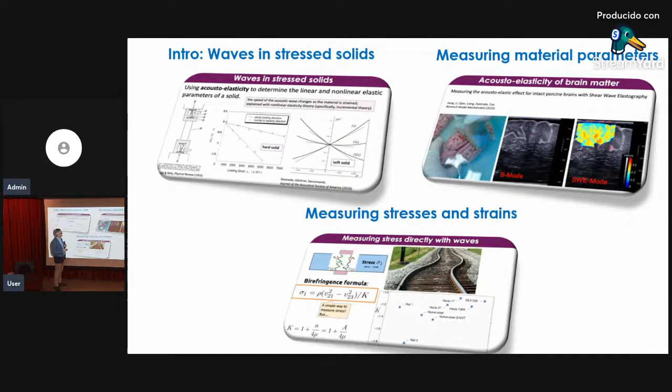I will introduce you briefly to the topic of waves in solids. Then I'll show you how traditionally it's been used to find the material properties of solids. And now I'll show you a new way of measuring stresses in solids. One way to do that: the idea is you send a wave in a solid, you measure how fast it goes in many directions maybe, and from this you can infer some conclusions, maybe anisotropy, maybe, you know, the faster the wave goes, the stiffer the material, so on and so forth. There's a lot of theory behind this, and you can easily connect the quantities one to another.

That's for linear elasticity. What if you want to go further and do nonlinear elasticity? Imagine that material is subject to not only a small strain, but a little bit further. I forgot to say, please interrupt me anytime you don't follow something, or if I'm not clear, or if you have a question.

No problem. So traditionally, what you do, if you want to know, say this is a piece of concrete or metal, for instance, and you want to know the material properties of this piece, you want to know how stiff it is, what are the elastic coefficients. So you send a wave, and you get access to one constant.

And now, if you were to deform the material, so here you see it's being compressed, then the wave speed is going to change, and that's what we have here. Changing the wave speed with the strain. What you do, you can have an acoustic actuator here, receptor here, you just send a signal and measure how long it takes to reach the other end. Then you increase the strain, and you can see that there are changes in the speed. There's two speeds here because there's two waves you can have, depending on the propagation, polarization, and so on and so forth.

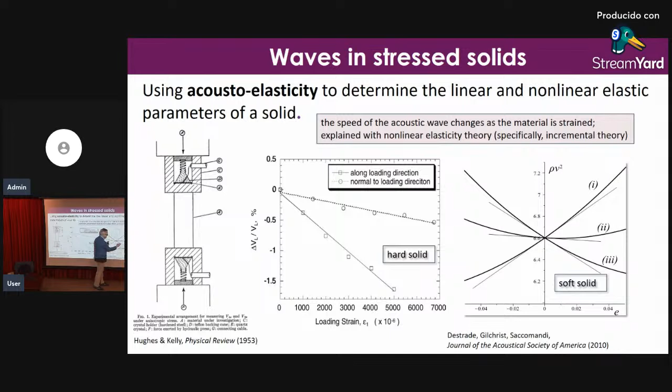Now, what if the material was soft, or could be deformed more? For instance, 2%, 4%, and then you will need to go a bit further in the expression of the speed in terms of the strain. But it's not that difficult. I teach this course often in graduate classes. It takes maybe a couple of weeks before you get to the formula, and then the formula is very simple. I will show you the formula. So you can either learn how to derive the formula, or you can just use the formula straight away. But you will find that at the beginning it's the linear variation, and then it's the quadratic variation, and so on, and that involves the other material properties.

Anyway, so I've been doing that mathematically, and then in the past 10 years or so, I've been doing it experimentally. But mathematically, like I say, it's quite simple. So you look at the propagation of the wave in the material that's deformed, right?

Lambda is called the stretch ratio, E is called the extension. If E is 0.2, for instance, or minus 0.2, it means you are compressed 20%.

And then you have to make some assumption about the material. You have to say, okay, maybe it's a soft biological material, so I'm going to look in the books, and they tell me that the Fung strain energy is quite popular. So I say, okay, I'm going to use this material. Then I won't go into the details.

Here you see the mu, that's called the shear modulus. You might come across that. And then B here, that's the stiffening parameter. That's, the more you stretch, which seems to be like an exponential growth in the strain energy. So really, that's what I mean by stiffening.

So there's just two parameters here, mu and B, that I need to determine for my wave speed measurements. And then if you do all that theory I was telling you about, you will find this relationship between the speed, that's the mass density, and then here you see there's mu, what I want to find, and b, what I want to find, and lambda that I can measure when I'm deforming the material.

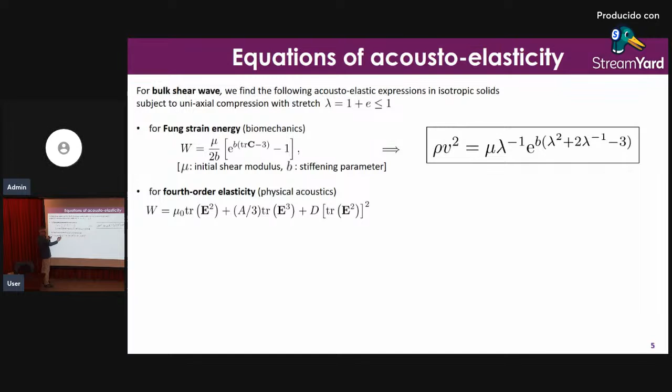So if you have a linear incompressible material, that's the strain energy. If you go a bit further, you expand in terms of E, the Green-Lagrange strain tensor. You have more constants that appear. These are called the Landau constants, or the Murnaghan constants. I don't know if you've come across this.

Don't worry too much. Say I want to find those three constants using that theory I was mentioning earlier. You will find this relationship now between the speed and the constants. You can see there's linear variation in the extension, quadratic variation in the extension.

And then in practice, these are measurements we did for the brain, for instance. You have a piece of brain, you measure the speed in the piece of brain. When there's no deformation, we find rho v squared is about, oh sorry, that's not in meters per second, that's in pascals, we find about 2000 pascals. So that tells you that mu, when E is 0, mu is about 2000 pascals.

And then we deform the material 10%, 20%, 30%, we just compress it, and we see that the speed increases. Now we just need to do a curve fitting exercise, very simple. We need to curve fit this to a quadratic, and the linear part will give us A, and then the third quantity will give us access to D. Or you could do curve fitting to this, and also. That's it. The principle is very simple, and anybody can do that using Excel probably, right?

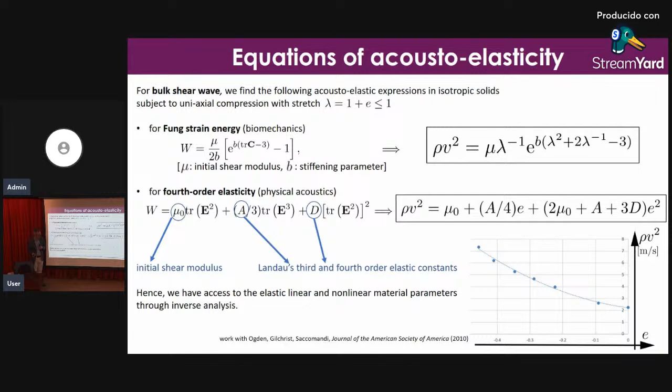And then you have access. That's it, that's the idea. How easy is that? I'll show you how we do it in practice. In practice, we use what's called shear wave elastography.

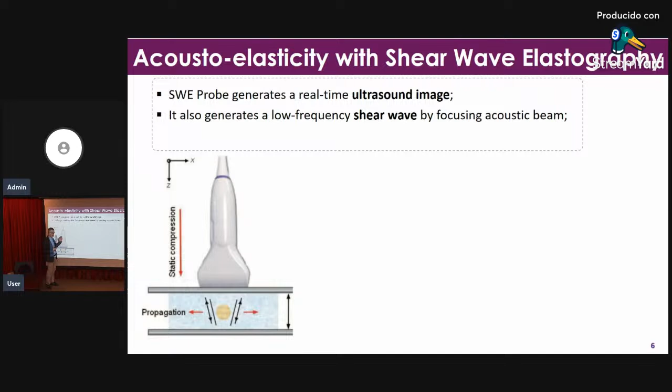So that's a machine you will find probably in Madrid, there's a couple of hospitals who have that machine. It's like an ultrasound imaging probe that gives you an image of what's underneath here in the tissues, for instance. And not only does it do that, but it also generates a shear wave. The ultrasound image is very fast, about 10,000 frames per second. So when the shear wave is generated, it just goes through the field. It's like a real-time video, and so you can capture it and measure its speed. It's very clever, and so that's the principle.

And what happens is that you focus a beam inside the tissue at the point where it's going, if you want to create a sort of small explosion, and then the focus of the beam goes deeper and deeper into the tissue, and then those successive explosions interact constructively to create a waveform here. That's the shear wave. So it's much slower, the shear wave is quite slow compared to the speed of the beam focus.

Okay, don't worry about this, just to tell you that this is pretty, there should be an animation here. Okay, don't worry. We did finite element simulation of what's happening, and so the beam goes down and the wave just travels like this. And then the ultrasound video just captures the wave and tells you how fast it is. And that's how we can do those measurements.

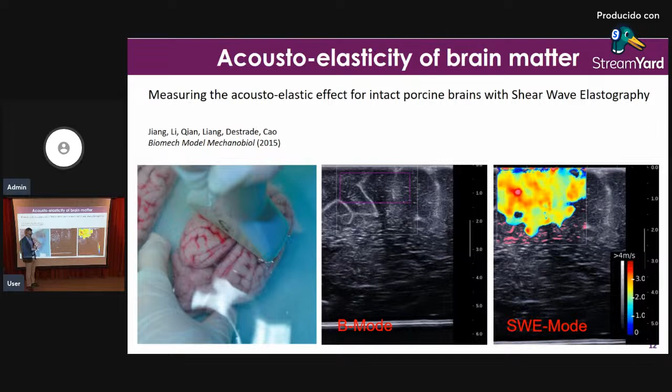Right, so the principle is very easy. We have those curves, we do the curve fitting to this, to that, and then we get access to the parameters. So just to show you what it looks like. Oh sorry, went too fast.

So we did this for 6 pigs, the left and right hemisphere, trying to find differences. There wasn't much difference. You see it's about 2 kilopascals, 2000 pascals for the shear modulus, and then you have nonlinear parameters, B for the full model, A and D for the fourth-order elasticity model.

So 2000 pascals, that's very, very soft. I don't know if you have any idea, but usually for rubber it's in the megapascals. For steel and quartz it's in the gigapascals. So brain is very, very soft - soft as, I don't know, yogurt basically, or jelly.

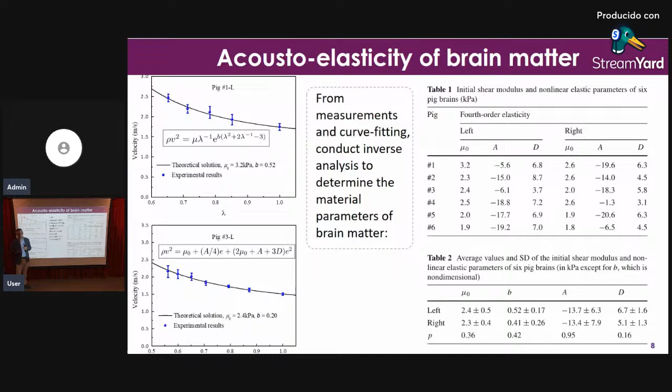Once you have the parameters, you can feed them into computer simulations. You guys do computer simulations, use Abaqus, COMSOL, that kind of thing. You know that when you define the geometry - this is a model we use in UCD in Dublin - you also have to feed in the elastic parameters, and the accuracy of the simulation is going to be as good, or as bad, as the accuracy of the parameters.

So here, that's a PhD supervisor. The PhD student is not happy.

It's very hard to know what happens in the brain because you can't put cameras in the brain, or sensors in the brain, during an event - maybe a concussion like here, or a car accident, or maybe surgery. But if you do a computer simulation, you can get an idea of how high the stresses and strains are inside.

Okay, so that was the first part of my talk.

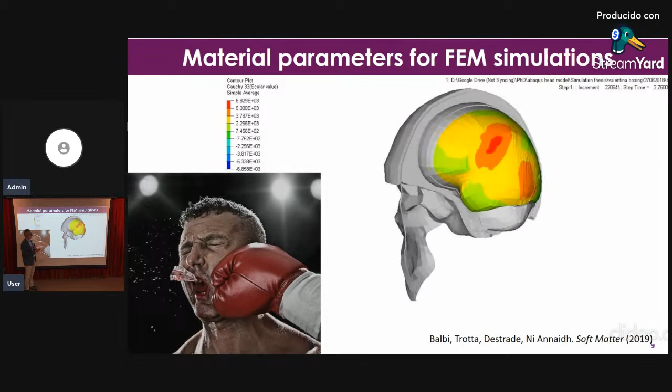You all happy? This is called traditional non-destructive evaluation of material properties, and that's the result you can get if you do computer simulation. Okay, now that's all good.

But what if you don't know the material properties of the material, or you don't have access to them? That's tricky. For instance, look at this beam here in the room, or think, since you're into aerospace, of a truss or a piece of metal in an airplane. The airplane is maybe 20 years old. You knew what it was made of at the time, 20 years ago, but ever since it's been going through thousands of cycles, suffering from fatigue and so on. Probably the properties have changed now.

Or look at this railway here. If it expands, going through those expansion and contraction cycles, and expands too much, it can buckle. It might be very important to know the state of stress in the rail before it buckles, because maybe you have guidelines telling you that if it reaches this stress it might buckle. So it's important to follow the stress, but sometimes you don't have access to the material properties. The only way I could access the material properties of this rail is to cut out a piece and bring it

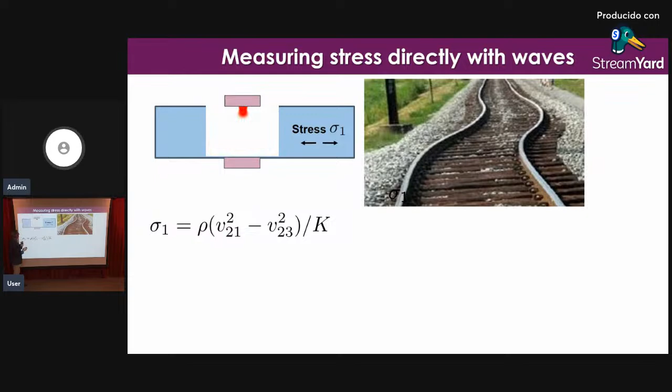So what you do is put an acoustic emitter and receptor here and measure the speed of two waves. One wave, 2-1, goes along the 2 direction and is polarized along the 1 direction. And 2-3 goes along the 2 direction and is polarized along the 3 direction. These are easy to measure - it costs nothing. Those ultrasonic actuators, you buy them for pennies, a couple of dollars or euros, and then you just rotate them and you get this.

So that's easy. And then you have this K here - that's the problem. What is K? If you look it up, it's called the birefringence coefficient. You'll see that it's defined in terms of A and mu - remember I was introducing A and mu earlier, or n if you use what's called the Murnaghan constant.

So it depends on second and third order elasticity constants. And you say, okay, so I just need to know K for this rail, and I'll be able to find the stress. But if you look in the literature, the problem is that there is no agreed value for K of steel.

If you look in the literature for a railway, you will find all sorts of values. There's different rails, there's different ways the steel is made, but the values vary a lot, from minus 1.8 to minus 1, and some of those rail samples were from the same railway, and yet they got different results. So it's very unsatisfying.

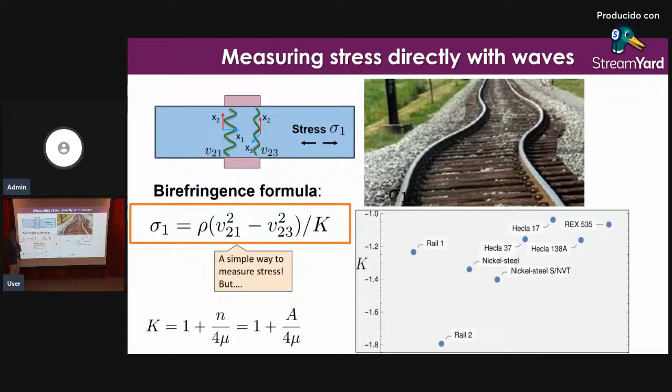You won't be able to measure the stress accurately. So a birefringence formula is used, but it's not great. So we looked into the literature again, and then we came across this formula. That's great. Look, all you need is mass density and the wave speed of two waves.

That's from Maurice Biot, 80 years ago. He said, all I need to do is measure the speed of the wave propagating along 2 and polarized along 1. That's the one I was showing you before. So I put the method here. And then the 1,2, that's the wave propagating along 1 and polarized along 2. That's the problem, right? That's why nobody uses this formula, because how am I going to measure this?

I don't know, I can't put a receptor inside the rail. I'm in trouble. So maybe I just cut it open and put the receptor in. But when you cut it open, then you're damaging it, it's destructive. So, big disappointment.

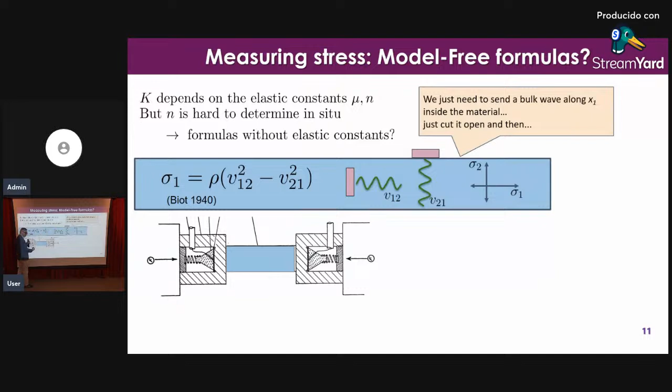Remember, the only way you can do that is by cutting a piece and bringing it to the lab. So, here's something I want to show you. Some maths now. You ready for the maths?

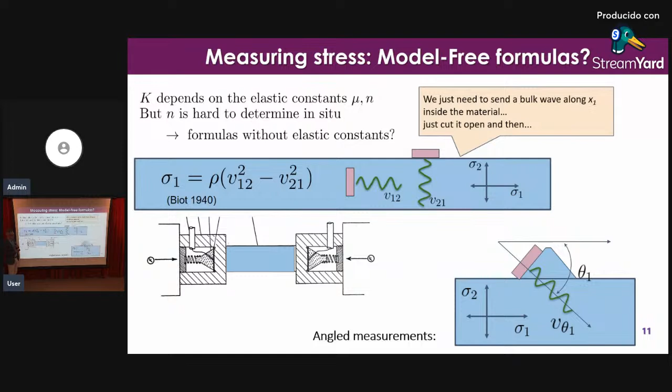Okay, so that's the speed going at right angle with respect to the axis. What if the wave was going at an angle? Why not? Let's see, that's not too hard. You put a wedge of steel, and then you just put the emitter on the wedge, and it's not too difficult to do that. In fact, we're doing that now in Sheffield, at the University of Sheffield.

So then you start looking in the literature. First, we're going to consider incompressible solids. Steel is not incompressible, but imagine it were. You find this very neat formula. I think that's very common. We wrote it in this form.

What do we have? Rho v squared is alpha. Here theta is the angle. And then you have alpha, beta, gamma. Beta is complicated, we won't need it, so I won't tell you what it looks like. So alpha and gamma are pretty simple expressions involving the stress and the stretches. Lambda 1 is the stretch in one direction, and lambda 2 is the stretch in the other.

Now look at these two coefficients. If I subtract one from the other, I will see that the fractions disappear. So if I was able to measure alpha minus gamma, I will get the stress straight away.

Okay, some maths now. Let's do some maths. What if I was to use this angle, 90 degrees minus theta? Then you might remember from high school that the cosine turns into sine and the sine into cosine, and so on. That's the formula for this complementary angle.

Now look, you have to do this in your head. If you subtract one from the other, the beta terms cancel out. The alpha term is factorized by cos^4 minus sine^4. The gamma term will be minus cos^4 plus sine^4. So I can factorize.

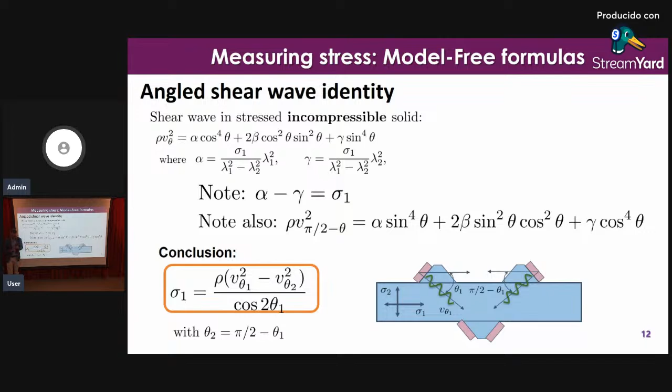So we're working on checking this formula in the lab now. That was for an incompressible solid, so now if you go to compressible solids it gets a bit more complicated, but you find that the formula still holds, which is great. It's very robust, provided you stop at third order elasticity. There will be corrections due to compressibility, but that's higher order, so the formula still holds.

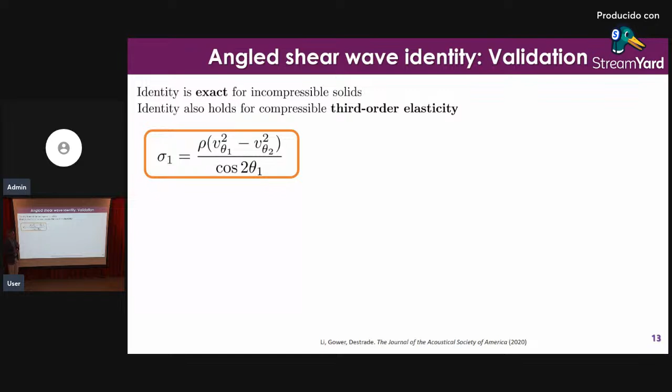The first thing we did for this paper is finite element simulations to measure the speed of the wave in a compressed beam of steel. Then from the formula, we deduce the stress. From the simulation, we know the applied stress, and you can see the difference is less than 1%. It's incredibly precise, at least in the simulations. So now we're trying to do it in the lab, in Sheffield—they're funded for this project by the US Railway Association and by British Rail. There's a huge interest in the rail industry about knowing what the stress is.

Okay, so you ready for the quiz now?

Any questions? Is there any refraction in the wave between the wedge and the structure? Yeah, there could be refraction. In the simulation it's easy because we have a perfect material. In the experiments you need to have a wedge, and there could be an imperfect interface, and then there could be some refraction. We're hoping that those effects are small compared to the formula, but you could in fact take that into account.

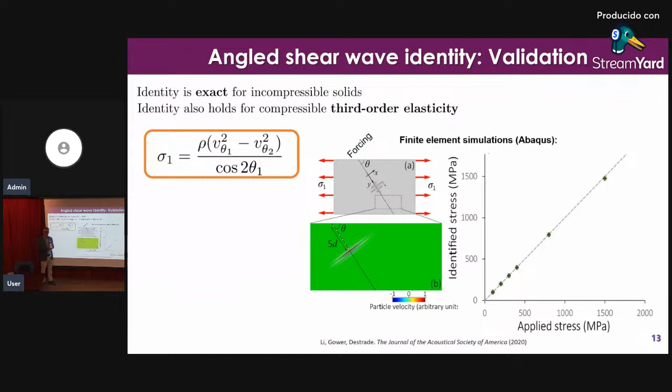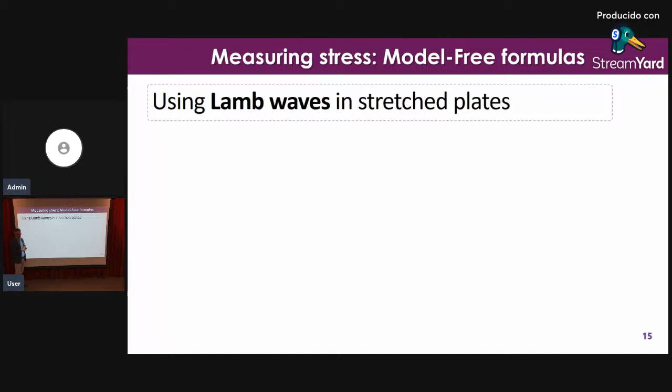I don't know if you do acoustics or waves, but plate waves are very similar to body waves, except they bounce off the boundaries. If the thickness of the plate is comparable to the wavelength, then you have all sorts of effects and the wave is more complicated. You'll also find there are different modes, symmetric and antisymmetric, and the wave is dispersive. When you generate a wave by hitting the plate, you get an infinity of wave modes propagating—symmetric and antisymmetric—and waves that propagate fast and waves that propagate slow, depending on their frequency. That's what's called dispersive, so the math is a bit more complicated.

You end up with a transcendental dispersion equation that you have to solve numerically. But still, you'll find that it depends on the frequency, and it depends on those two quantities I was telling you about earlier, and the beta as well, and so on.

It just so happens, if you study the dispersion graphs, you will notice a few things. There are limits, there are ways of getting information about alpha and gamma from the dispersion graph. One thing you can find is that you have access to alpha and gamma independently from the dispersion curve, and that's brilliant, because remember, alpha minus gamma is sigma.

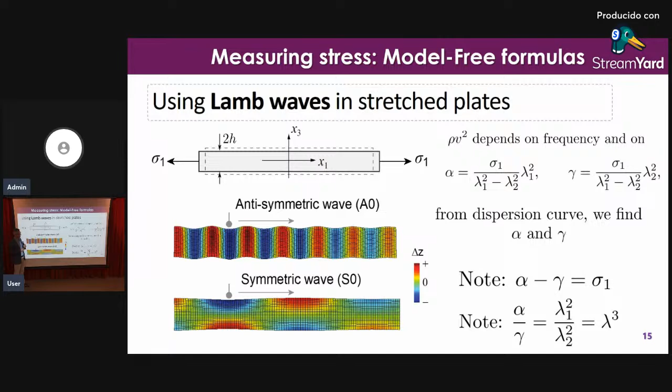Amazing. And we say, okay, let's do it. We did it for a rubber membrane. We hit it here with a piezoelectric probe, and then I make it sound like it's easy, but it's very advanced.

I used colleagues in the Harvard Medical School, and they use what's called OCT, optical coherence tomography. It's like a laser imaging technique that allows you to pick up tiny displacement on the surface of materials. But you get access to the antisymmetric, symmetric modes and so on. It's a lot of image processing, two-dimensional Fourier transforms, and so on and so forth.

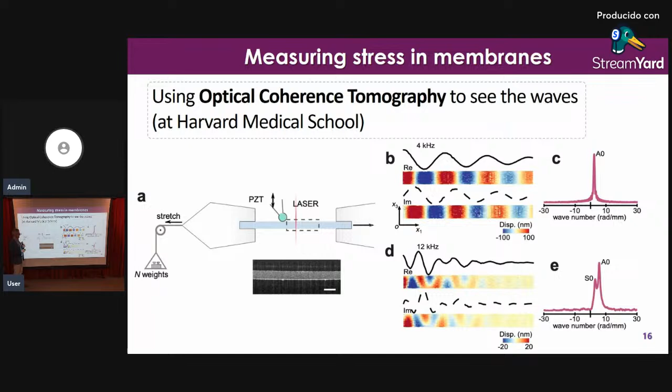I won't go into the details, but the idea is that you have the membrane, we hit it like this, and this is a photograph, not a simulation. If you look closely, if you zoom in, you will find some imperfection. So it's a photograph.

The radius of the wavefront is in the millimeter. The elevation is in the nanometer. So what we did here was blow up the vertical axis, that's why it's arbitrary, blown up from the data, so that you can see exactly those wavefronts we saw earlier about the water waves. But it's a photograph. Amazing, I find it amazing.

And then you can stretch the material by a known amount of stress, and you can see that the circles turn into ellipses. You then analyze this field here. So that's all the movie from above. You can see it effectively.

Then you analyze the film and figure out the speed of each wave for each frequency. And then if you increase the stress, the dispersion curves are going to shift like this, and so on and so forth. And then from the dispersion curve, I can find alpha and gamma, and so I can find sigma. Sigma 2 is 0, that's as it should be.

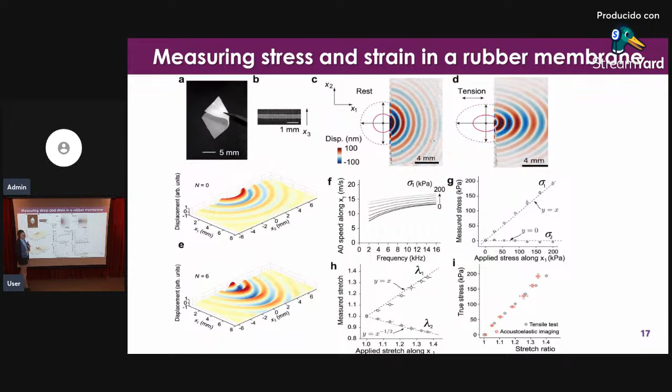So if you're like an early-stage researcher, you say, this is fantastic, this is brilliant, I will write a super paper about that. But then if you're more seasoned, or if your advisor is more seasoned, he or she will say, why don't we push it to the limit, make it more sexy if you want. You could sell it to a bigger audience.

And then I said, let's bring it to the next level. In fact, it was my wife who said that. So you shouldn't underestimate the power of trying to explain what you're doing to others.

I'm sure you have friends who are not in this field, and they ask you what are you doing with your life, what are you studying at your age. You have to explain it's really important, and then they go, oh, I see what you mean.

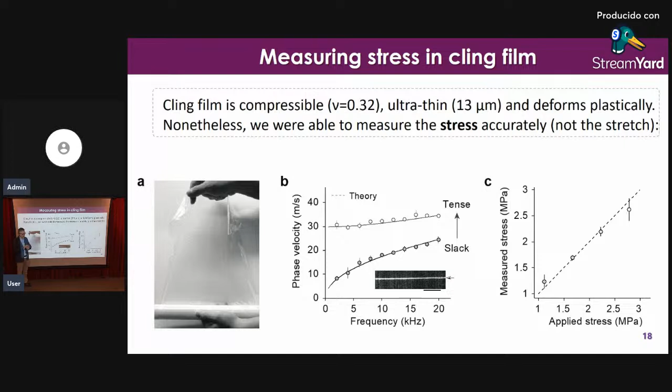I was telling my wife we were measuring the speed of waves in stretchy materials, and she said that makes me think of this drum, the bodhrán. I'll show you what the bodhrán is. It's this traditional drum in Ireland. If you go in the pub there's a good chance you might see one. Shall I click it? Oh never mind, there's a YouTube link.

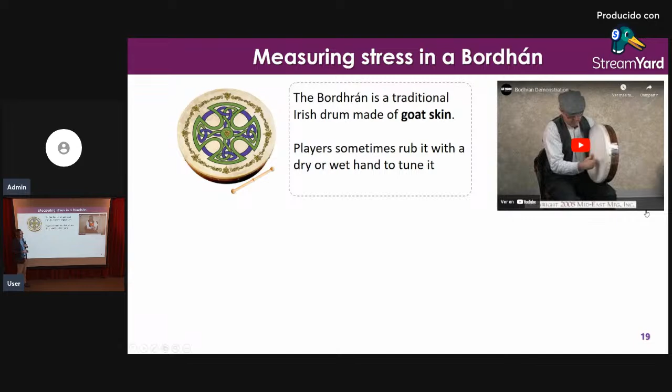Anyway, she told me, did you know that bodhrán players sometimes wet the drum head to make it slacker, or rub it to dry it and make it taut? That's really interesting, it turns out everybody in Ireland knows that. So I thought, why don't we do that? I bought an Irish drum online and sent it to Boston, delivered during COVID, it's crazy. They did experiments, wet it, dried it, and saw there was a big shift in the stress and strain, more than 50% difference.

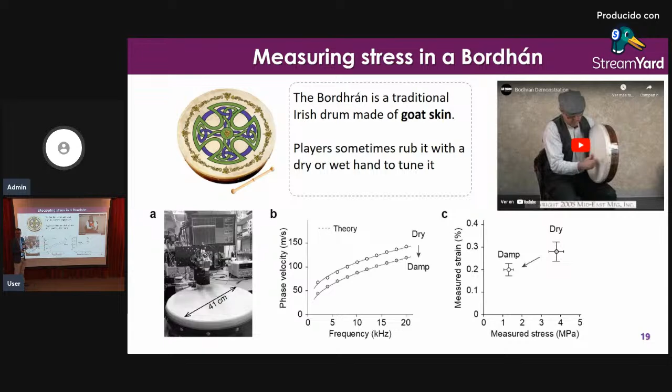That was pretty cool, so we put it in the article. Once you have an article with a sexy result like this, you write a press release and send it to the press office. You say, hey, I got something about the bodhrán, and they go, what? That's amazing. Then they send it to the newspaper, and sure enough it was taken up by the Irish Times, the main newspaper. My poor wife said, why did I tell you that? It was on the front page, the Irish love things about Irish culture. I'm sure in Spain you'd find the equivalent, something local and traditional that would get people excited. I felt like I've arrived and can retire now.

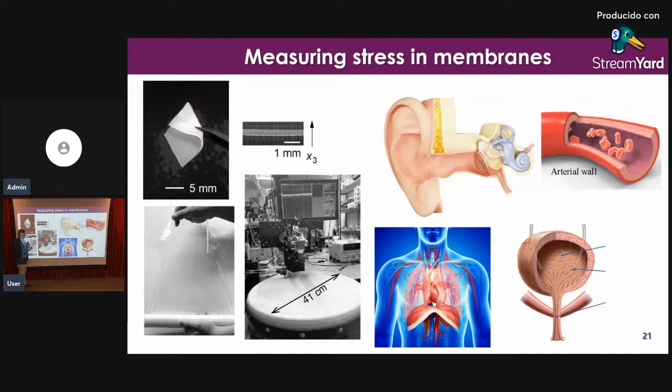For all those things, people ask why are you doing this. In the end, we want to apply it to membranes in the body, like the diaphragm, the eardrum, the arterial vein walls, or the bladder wall, scales ranging from millimeters down to tens of micrometers. That's the dream. Of course it's far in the future, but maybe I'll get there.

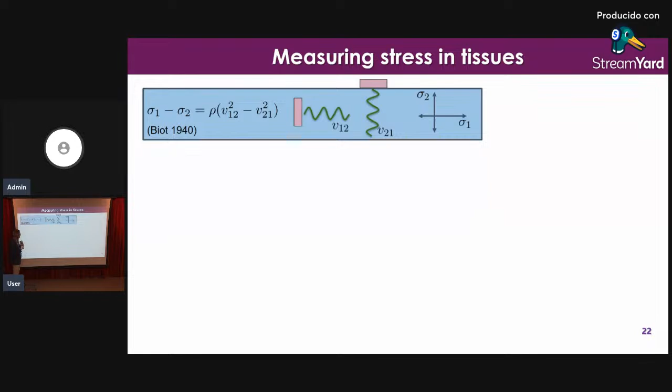Okay, so that's it for waves in plates. Now let's go back to waves in the real situation. Remember, the problem is you cannot measure this wave speed with acoustic or ultrasonic devices. If you recall what I showed you about shear waves, classical ultrasonic evaluation is easy to produce. Shear wave elastography is the opposite: the probe can generate a wave that goes in this direction, so it's easy to measure that one.

So wouldn't it be nice if we could do this? Well, we can't use shear wave elastography in beams, in steel, in hard solids, so that was a no-go. What about generating this wave in soft solids? Let's try this. What you have to do is program the probe so instead of a beam going this way, you have one going that way, generating a wave in this direction, and you have to do it simultaneously. So it's not easy.

It's not me who did it, it's my colleagues in Beijing at Tsinghua University. They managed to program the probe to hit at six points on a horizontal line, creating those explosions, and the wavefront is generated in this direction, at the same time as one generated in that direction. It's quite a technological achievement, I wouldn't be able to do that. It shows the importance of collaborating with people who have different expertise.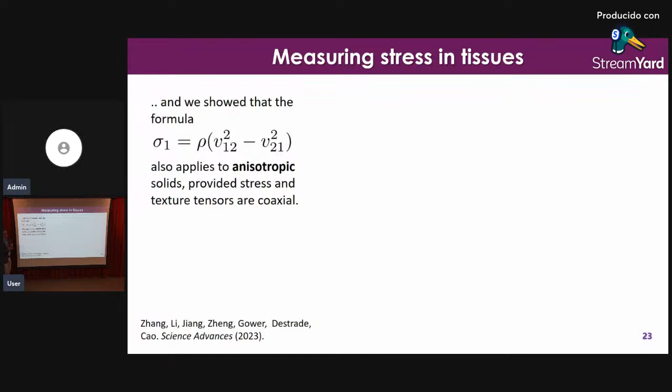So again, we have this formula. We don't need to know what the material is made of. We just need to know that it could be anisotropic, provided the stress and the texture, the anisotropy tensor, are coaxial. And the formula works. So that gave us access to the stress through this formula, right?

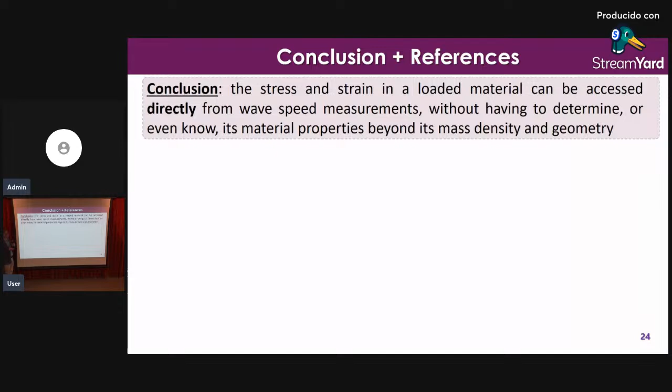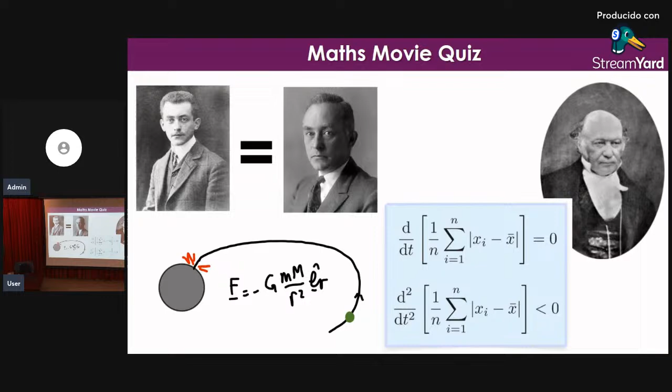Do you have this? Let me move it like safely. Sorry, because at the beginning of the presentation it wasn't working, so I was the one passing the slides. But then in the middle it started working. Yeah, it started working, I don't know. Oh, I'm sorry, maybe the battery is gone. I don't know.

But hi, I just got another question. How do you apply this method with an organ that contains liquid? For example, the heart. Can you measure the heart with liquid on it that you don't have access to? Sorry, other, sorry. Yeah. We're going to have coffee. Do you want coffee? Okay, yeah, I come. Yeah, okay, I wait for you. Okay.

Yeah, if you concentrate on the solid part, yeah. Yeah, with the machine.